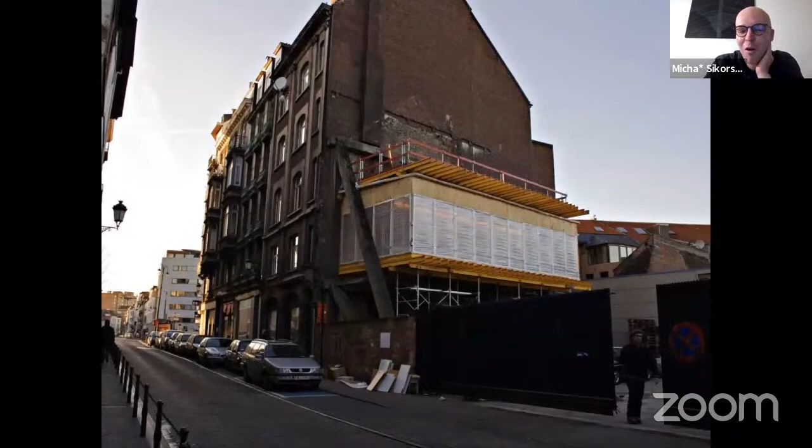You also built your own office, your temporary office in Belgium. And then 2 years later, you've been invited by OMA and Koolhaas to co-design and co-curate with them an exhibition about their work in the Barbican in London, an exhibition I had the opportunity to see. It was very, very interesting.

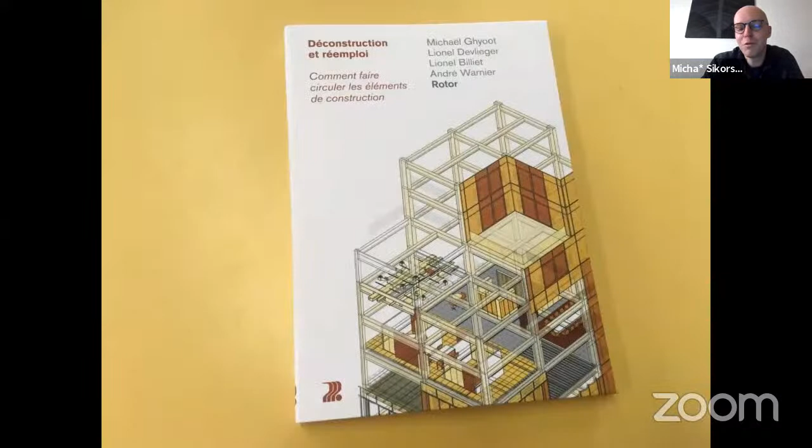You keep on writing also and teaching today in the most prestigious schools and writing articles in probably the best architectural criticism publication, Criticat. But on the other hand, you also build stages for rave parties or concerts, and you publish books at the Polytechnic School in Lausanne, Michaël, about reusing materials. You're really a Renaissance person, at the same time designing, being an expert in the field of material reuse, and teaching, and animating the architectural scene in Belgium and abroad.

On the other hand, you still find the time and the organization capacity to go beyond the normal way of practicing architecture and developing a new business model of selling parts of buildings. So you established Rotor Deconstruction, Rotor DC, which is a website and a physical shop in Anderlecht, next to Brussels, where people can buy whole parts of dismantled buildings. So you have an expertise of unbuilding buildings, allowing them to be rebuilt. Thanks to you, in my former kitchen, I had a piece of the Antwerp Town Hall. And in the flat I'm in here, we have doorknobs from also another Belgian building.

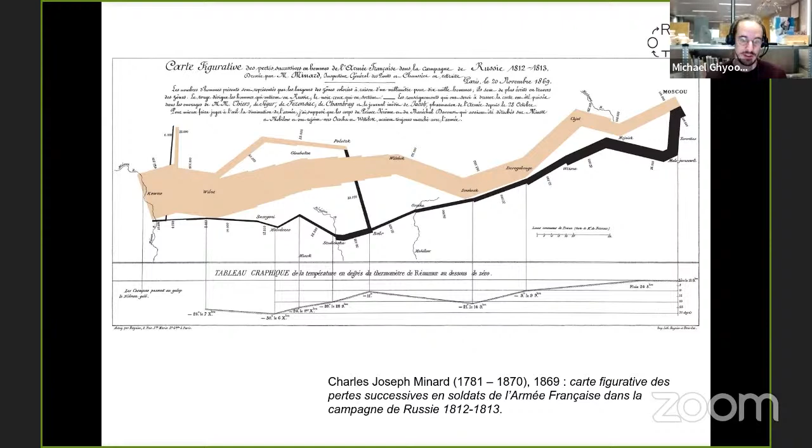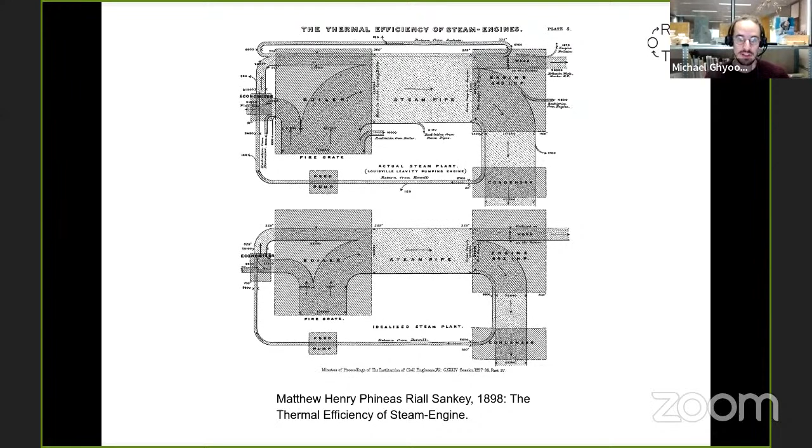So it's a good backbone for my presentation to try to share with you a few findings we have. We could start with the beginning of the diagram, the extraction of natural resources, which is probably the most important flow on the diagram. If you want to illustrate that, you could find very striking pictures, such as this one by Edward Burtinsky, which represents a copper mine in the US - not in Europe, but I guess it's representative. You see the scale, the magnitude of such an extraction site. To give an element of scale, these things there are trucks and lorries.

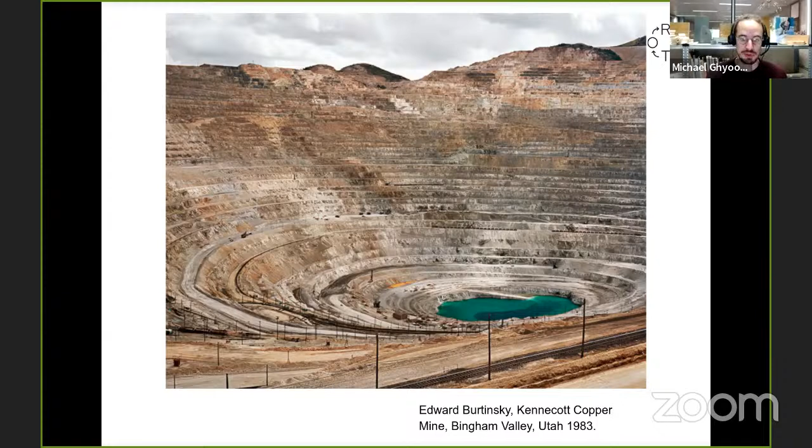So it's really a mountain that has been completely dug out to extract ores, which are then used to produce copper. This is interesting because the production and extraction in itself is a process that produces a lot of waste. Only a small fraction of what you extract from the ground is actually used to produce goods and things, and this ratio depends on each material. For instance, for gold, it's a very, very small amount of all what you need to dig out that is used to produce gold. It's a little bit better with iron ore that's used to make steel, for instance. But it's important to know that even extraction produces a lot of waste, and these wastes are maybe less known than the post-consumer waste that we are used to deal with on an everyday basis.

Not only mineral elements are extracted, but also organic elements such as wood, and it also comes with severe consequences for the environment - notably deforestation, which is really a big concern nowadays. I like this quote from a novel by Richard Powers, which is really an ode to trees and what trees are able to achieve.

It ends with this very interesting punchline, which says: to solve the future, we must save the past. My simple rule of thumb is, when you cut down a tree, what you make from it should be at least as miraculous as what you cut down. So it's an interesting reminder maybe for us architects who are used to using different sorts of materials, wood being part of them. Maybe if we continue on this diagram, we could jump to the second theme, which is the raw and the cooked, as a reference to Lévi-Strauss, of course.

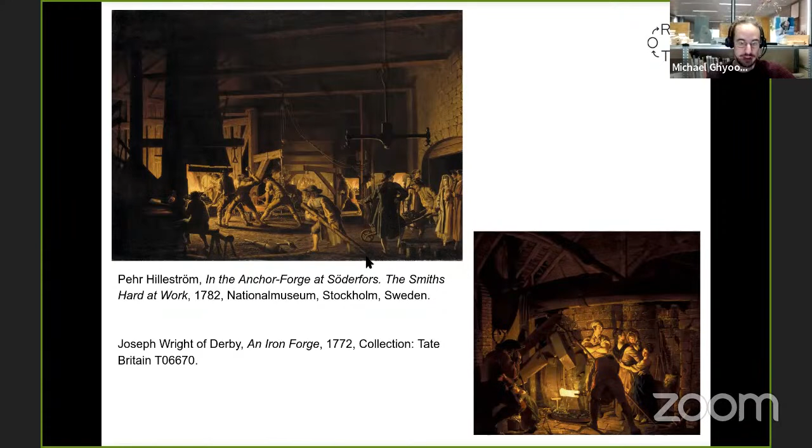As a matter of fact, most industrial processes at some point use ovens or kilns, some sort of heat energy to transform materials. You can think of the different metals made from forges, which use fire and got bigger and bigger to give birth to the high blast furnaces still used nowadays, which use a lot of heat to melt the ore.

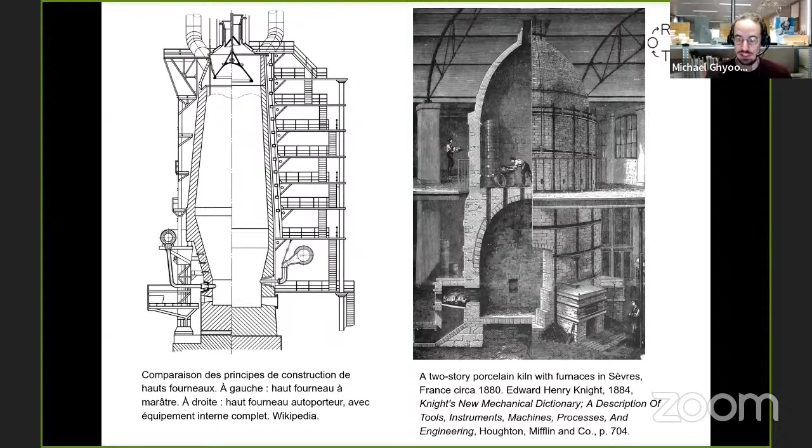But you can also think of bricks and faïences and different sorts of materials that are also cooked in kilns and ovens just to make them harder and more resistant. And obviously that also uses energy and fuels to achieve.

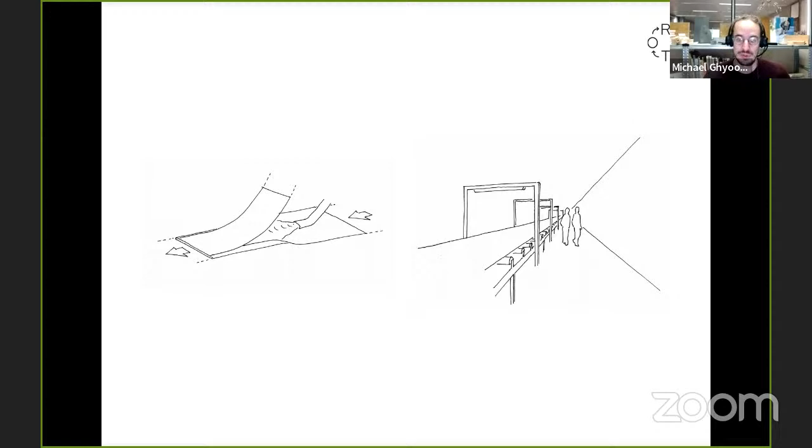You can also think of plaster, gypsum, which technically can dry in the air. You don't necessarily need to add any extra energy, except that in nowadays industrial production of plasterboards, they usually use an oven at the end of the process just to accelerate, to make it faster for the boards to dry. So there again, they use fossil fuels to produce even gypsum boards.

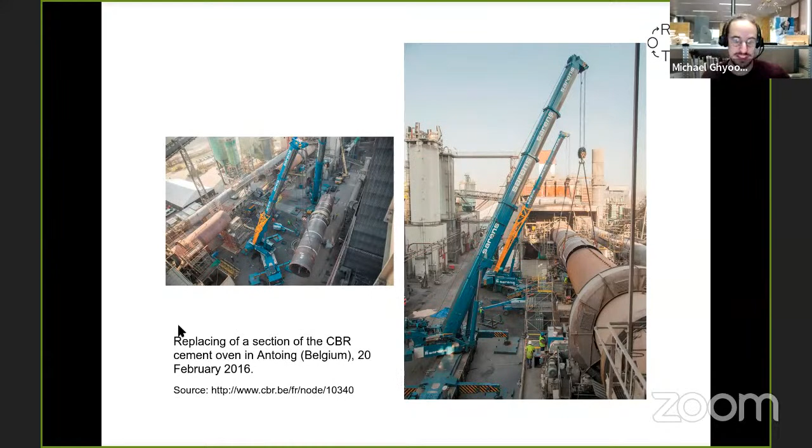And then maybe the most representative of all these cooked materials is certainly cement, which is made basically by heating chalk and bringing it to very high temperature where it transforms into clinker, which is used then to produce cement. Interestingly, the cement industry used to rely on fossil fuels until the 1970s and the first oil shock.

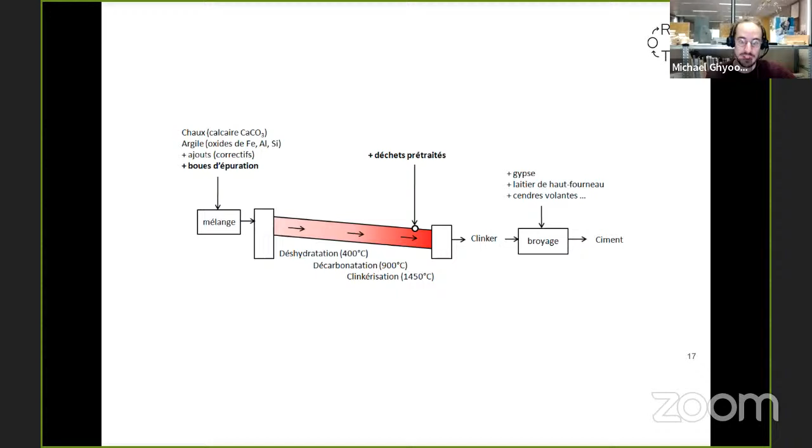And after that, they tried to diversify the types of fuels they could use. One of the things they use nowadays is ultimate waste coming from different industrial sectors, used for their calorific power. So you have, for instance, animal fats or used oils or different sorts of solvents.

Or in some countries, not in Belgium, but in other countries, you can even use tires, rubber tires from cars or trucks as fuel. And this is an interesting industry, not very well known, the preparation of those substitution fuels.

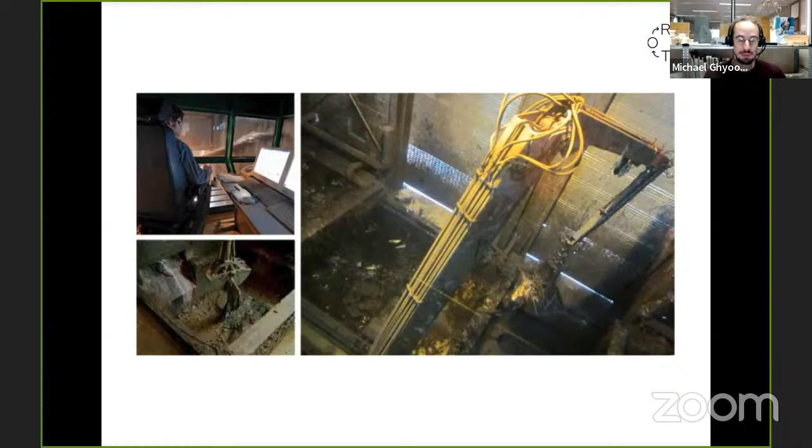Cement ovens are also used when you need to make something disappear. So for instance, when the police find, I don't know, drugs, they put it in these ovens just to make it disappear. Or when there is an epidemic of influenza in the meat industry, it happens that dead animals, carcasses, are just thrown away in these ovens to make them disappear. And actually, with their fat, they contribute to bringing this calorific power.

The thing is, and you're probably all aware of that, when you burn things, especially if these things are made somehow of carbon, as all the examples I showed, what you get is energy on one hand, water on the other, and then CO2, carbon dioxide. And obviously this is a major challenge for today.

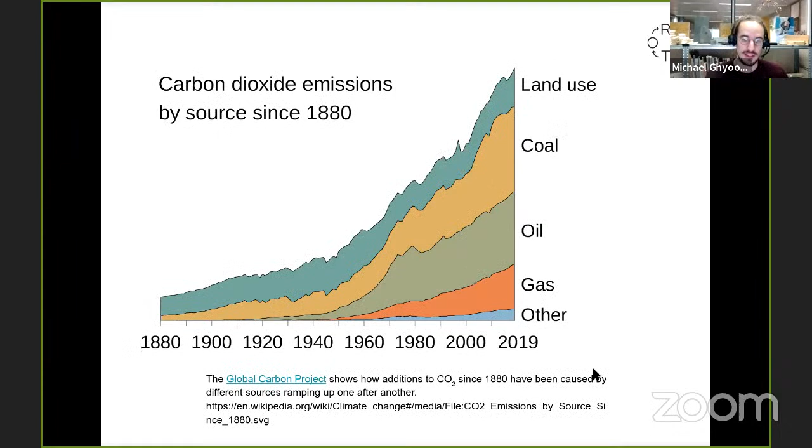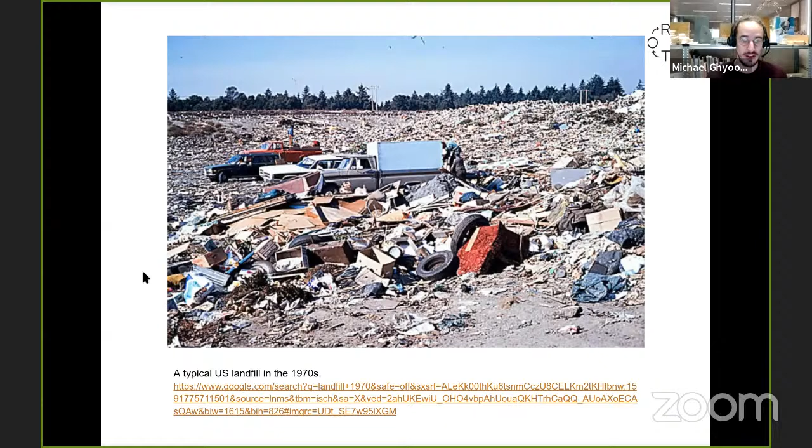So to put it a bit bluntly, during the 20th century, the major outcome for used goods was the landfill. And you see this sort of primitive landfills, which still exist nowadays in some regions, slightly more sophisticated today, but which also come with a lot of problems.

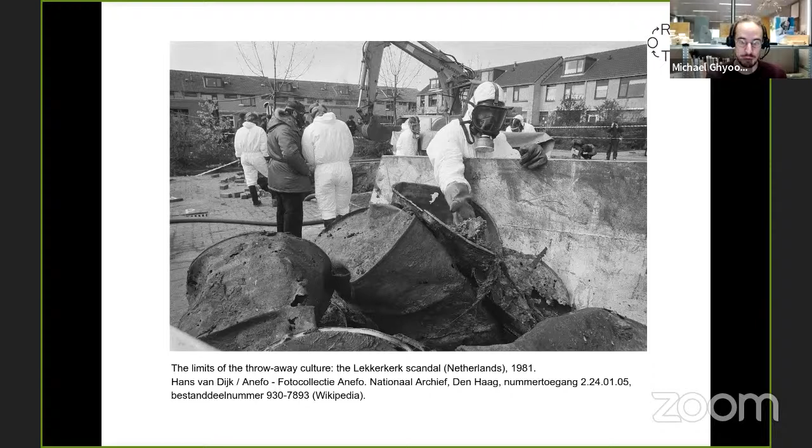This is a major scandal in the Netherlands in the 1980s, in which they found out that they built a housing development on a former landfill in which toxic waste was landfilled. This produced a big crisis, and for most European countries, from this moment on, they started to regulate much more sternly these landfills. Nowadays you find layers to protect the soils and avoid leaching and other undesirable phenomena.

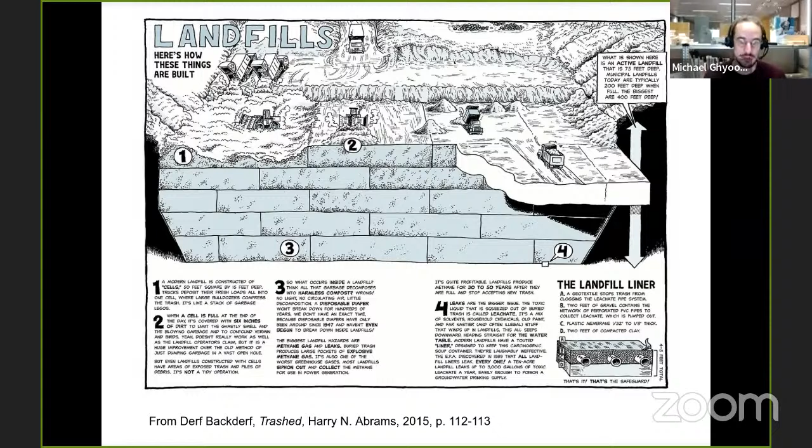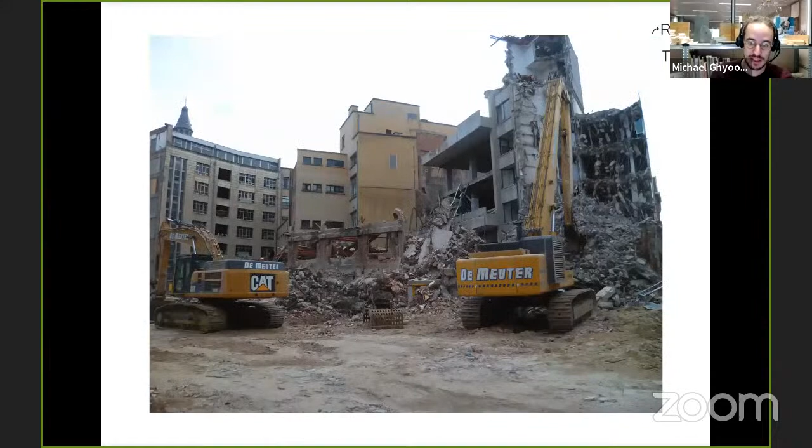Actually nowadays in the European waste regulation, there is a hierarchy that is enforced. The less desirable waste management strategy is landfill, then incineration, then recycling. Recycling, in this case for buildings, consists of trying to transform the materials back to the raw material that can then be used in new applications.

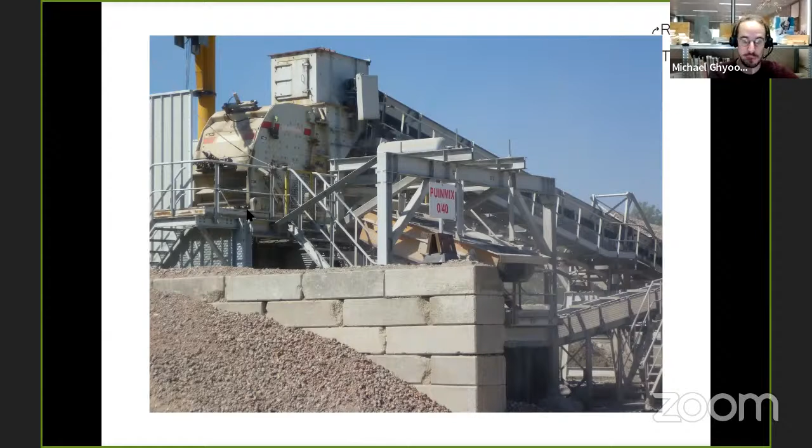You see there a crushing facility transforming concrete and masonry rubble into granulates, recycled granulates. They use different sorts of crushers to do that. Interestingly, most of these machines originate from the mining industry.

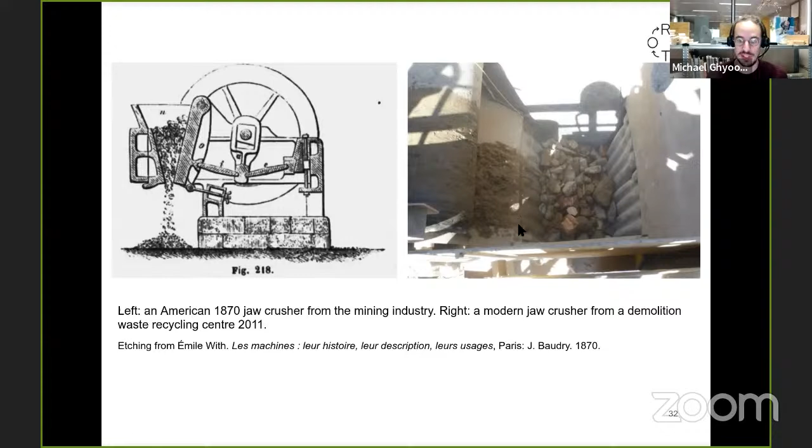In Europe, in some regions, you can really see a sort of translation from the mining industry that somewhere declined, but usually in this region you also see a rise of the recycling industry, and there is a sort of transfer of technology, but also maybe of labor and other aspects as well. So you see there a machine from the 19th century that is still used nowadays to crush this construction rubble.

Obviously, these recycled granulates are a good alternative to using raw material. They can help mitigate the use of virgin resources, but they also come with a loss - a loss of the use value of things. What used to be the structural backbone of a building becomes just backfilling material, and it also comes with a loss of economic value.

In some countries - in Belgium it is the case, or at least it was the case some years ago - the cost for the most basic granulate was simply €0 per ton, simply because the demand is way lower than the offer. In other words, we demolish more buildings than we need recycled granulates for building roads, for instance.

Interestingly, and that's maybe where the work of Rotor started, it's this finding that if you keep these elements intact - these ceramic tiles, these bricks, or these stone elements, I'm not talking about concrete here, but all these elements that are mixed in these rubbles - if you keep them intact and if you reuse them, they can have a retail value that is much higher than the value of the recycled content. So at least for these sorts of materials, reuse should be the preferred option.

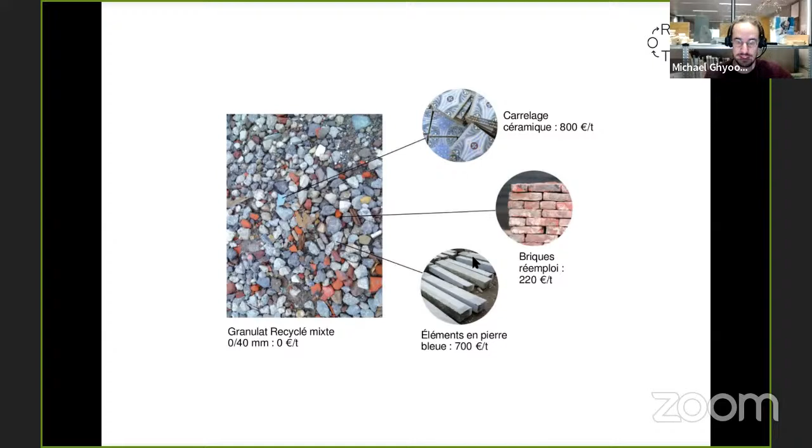So that also questions a little bit this idea that recycling could be the one-size-fits-all solution. It's possible, it's certainly a part of the solution, but it's not the only way to do it. We need to have a more global overview on this question. And that's maybe the idea that we find quite interesting, and that was a bit the starting point of Rotor: this idea of switching from dealing with flow to managing stocks of assets, stocks of natural assets.

This is actually the basis of this notion of circular economy, at least how people like Walter Stahel put it. They really see that as a shift in the economy, a shift towards modes of production of value that derive from maintaining existing goods in circulation, that derive from taking care of existing stocks.

And you could see that as a sort of extension of this notion of heritage that would start maybe from this idea of heritage as equivalent to listed buildings, but that would enlarge this vision to basically everything that has been built and that is existing nowadays, and that we learn to take care of, and that we learn to maintain and to preserve. And this is a very interesting and provoking idea.

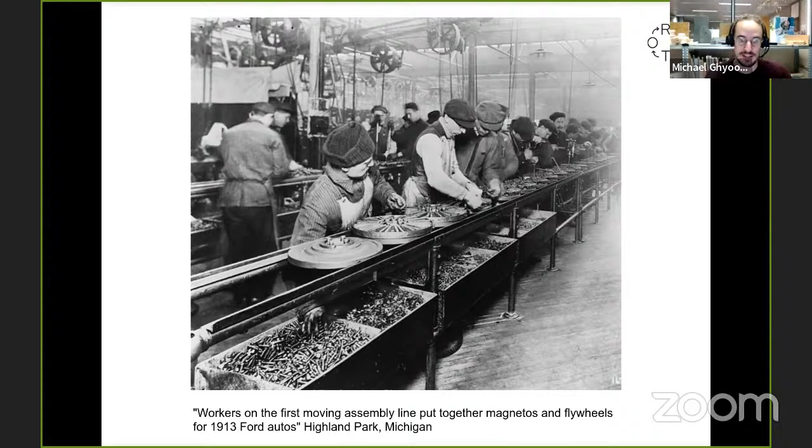Obviously, this mostly concerns inert materials. Food, for instance, couldn't follow the same pathway, but for the construction industry it's a very interesting notion. Walter Stahel explains that the industrial economy is based on the idea of increasing the sale of material and optimizing production to put as much goods as possible on the market, and as a consequence, making goods that don't last too long so they can be replaced by consumers, sustaining this productivist economy.

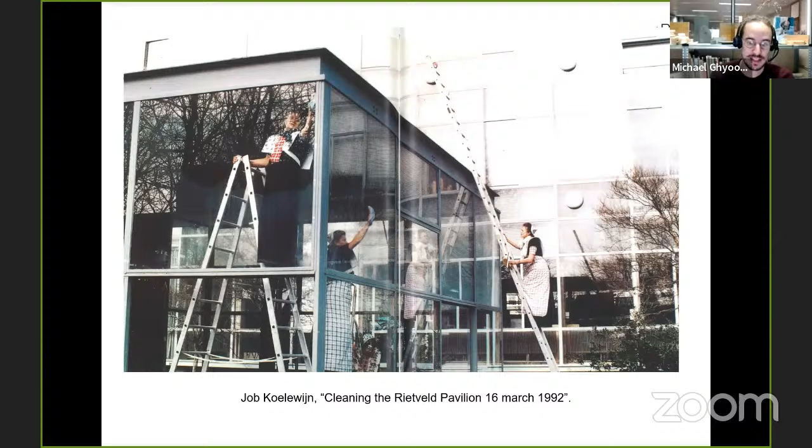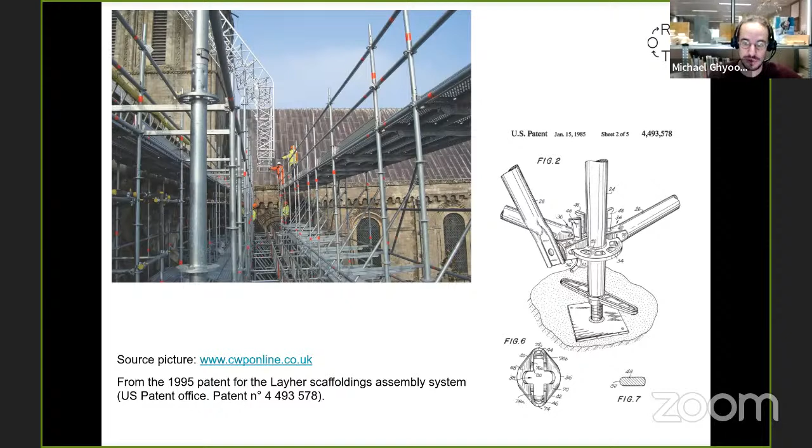The shift towards a radically circular economy would focus on trades such as maintaining buildings, taking care of them and cleaning them. Or you can find other examples in industry, like scaffolding, where systems are designed to be easily dismantled, demounted and reused again and again. Obviously the time span of scaffolding is relatively short, so it's easy to imagine these systems. It's a bit harder to translate that into actual buildings expected to last decades, but there are interesting things to learn from these systems.

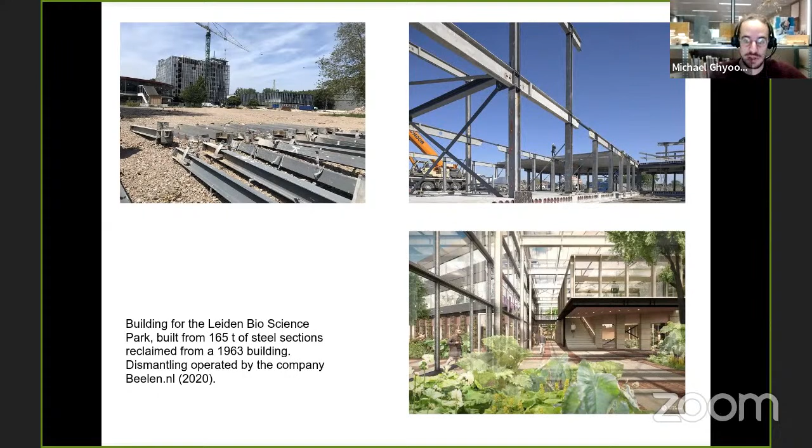Another example of an already circular economy is companies active in the reclamation and salvage of building components that can then be reused. In fact, reuse is an excellent way to keep in use a material that's not useful anymore in one place but can still be used somewhere else. This economy of reclamation dealers is super inspiring and important to us at Rotor, because it shows that circular economy is not only wishful thinking.

That's a project very important to us at Rotor: documenting this already circular industry, more specifically reclamation dealers. This project started in 2011, and the idea was simple. There was a will in the Brussels region to apply the principle of reusing building material, but it would be a mistake to start from scratch. It would be better to look at what already exists and see what we can learn from that, and build upon it instead of starting from a white page.

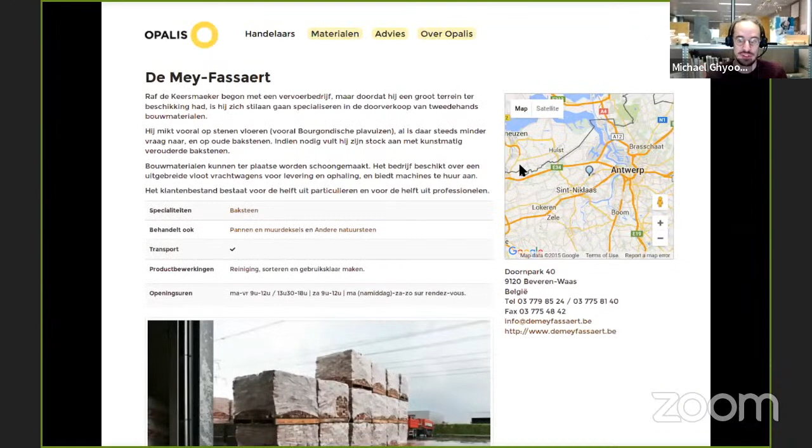I think Opalis was a very important project for launching Rotor Deconstruction, because among other things, we found out that if certain materials were taken in charge by these existing companies, there were still a few missing links, more specifically urban materials and materials coming from office buildings and specifically urban types of buildings were not usually salvaged, or at least at a much lesser rate than rustic or traditional classic materials such as bricks, pavers and stones and that sort of thing.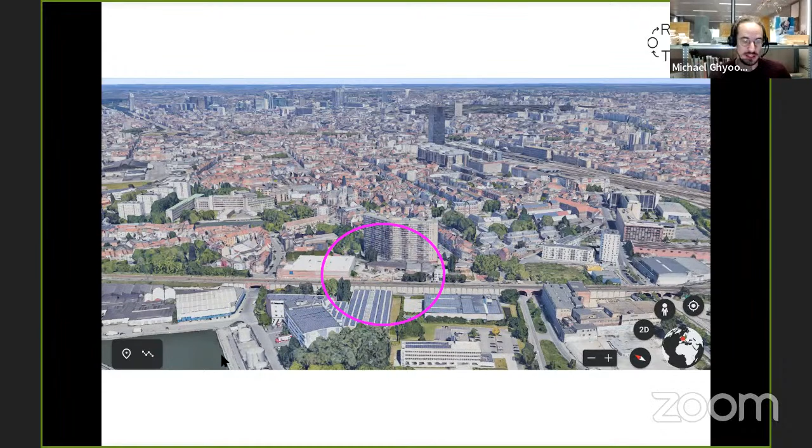So we are based in Brussels. We moved here in 2016. You see there, it's really the city center, downtown. So it's a very interesting place, just in between the residential, very dense, popular area of the city, and then a more industrial part alongside the canal, of which you see a small bit there.

So we are, for the moment, in a former chocolate factory. We don't use all this white warehouse, only a part of it, but we use all this yard and this warehouse. Basically, reusing materials requires quite a lot of space, and in an urban context, it's not always easy to find that. So that's for us a very big challenge. But we found this place on a temporary basis, and that was a good solution.

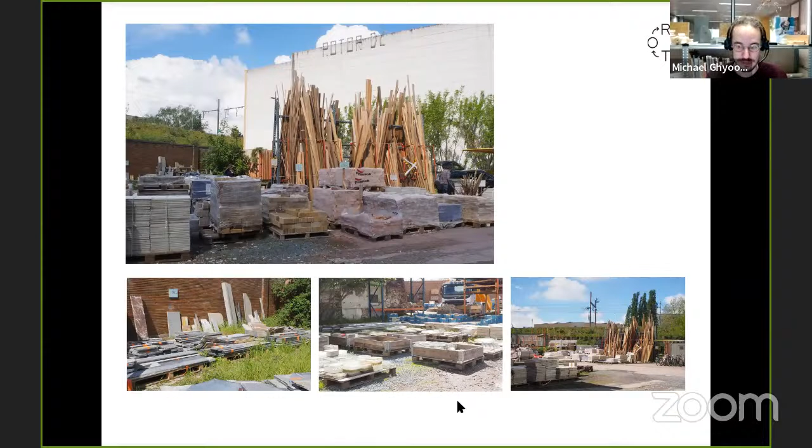You see there a few pictures of the type of materials that we reclaim and propose to our customers. These are pictures of the showroom, which is actually just behind me, where you see also a bit more precious materials such as luminaries and lighting fixtures, that sort of thing. This is a picture of the warehouse outside, where we store more bulky materials, but that can be left outdoor.

It has been quite an adventure to launch Rotor DC. Basically, we had to learn a lot of things while doing it. We are still learning quite a lot of things.

Even marketing materials is a challenge in itself. So beside the physical showroom, we also launched a web shop, which also allows us to keep a good view on the stocks. Because obviously that's quite important to know when you have a limited amount of, say, reclaimed ceramic tiles. You need to know in real time how much of it is still available for the customers, and that's why we invested in this digital solution.

A big part of the work is also the reclamation itself, the unbuilding of the materials. Sometimes we do that ourselves, and we have teams in-house that are able to do that. But we also try, and we increasingly try, to collaborate with other contractors of the construction industry, demolition contractors, but also different types of specialized trades.

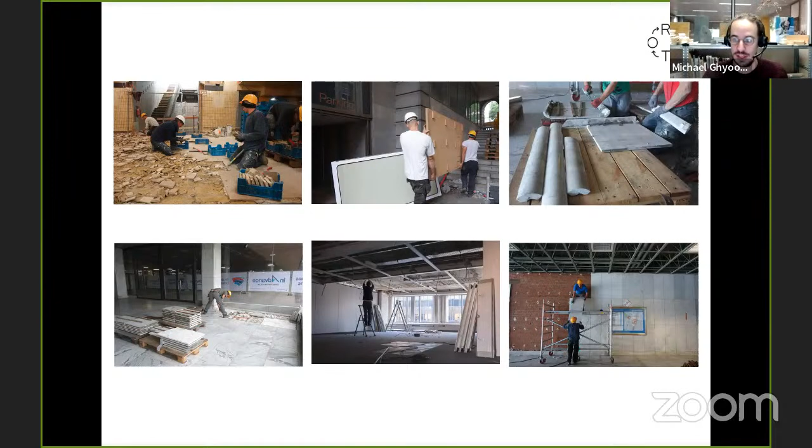They can bring materials to our facilities, and we take them in store. We clean them, we put them back on the market, and then we share the profits of the sale with these people who bring the materials. So it's a good way for us to expand the amount of materials, but it's also interesting because in this scheme, each and every contractor can potentially become a salvager.

And so that also allows us to focus on the actual preparation of the materials, because there is a big difference between a material that is just raw from the dismantling and a material ready to be reused. Sometimes you need to clean edges, remove traces of mortar, cut things to dimensions, rewire electric appliances, clean sanitaries, for instance. You have to document the materials because obviously customers want the most precise information. And then there is all the sale aspect and welcoming the clients and offering them the services that they may need.

What is paradoxical is that this idea of reusing and developing a business around reclaimed materials is not really new. In fact, when you look at the big picture, it used to be the norm during most of history, and it started to decline only during the 20th century.

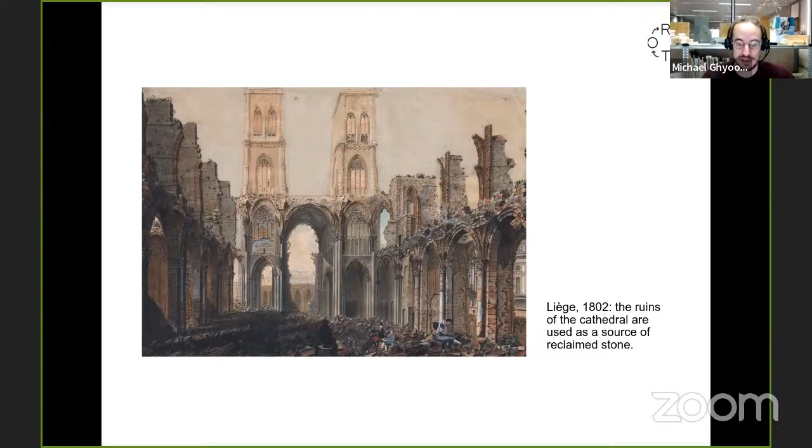This is another example, the Cathedral of Liège, which was completely destroyed during the French Revolution, but was still used as a sort of urban quarry for stones for decades and decades, and archaeologists still find stones from this cathedral being used in different buildings all around.

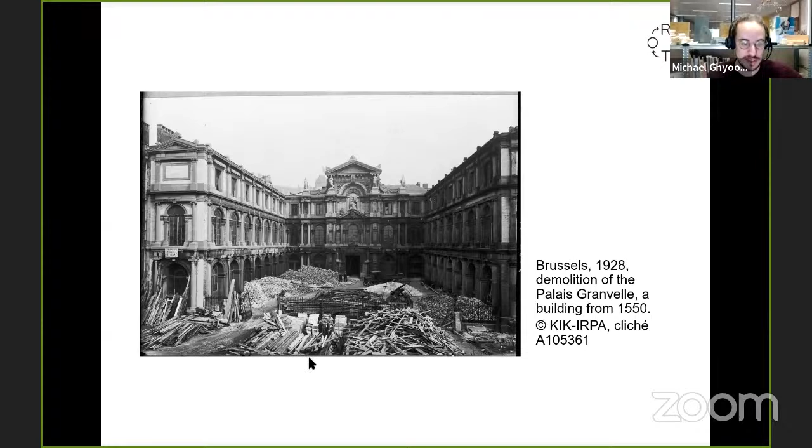This is an example from the early 20th century in Brussels. It's impressive to see how well sorted these materials are, and obviously there is the intention of reusing part of them, which explains why so much care is invested in this demolition. If you look there, you see this small ad on the facade.

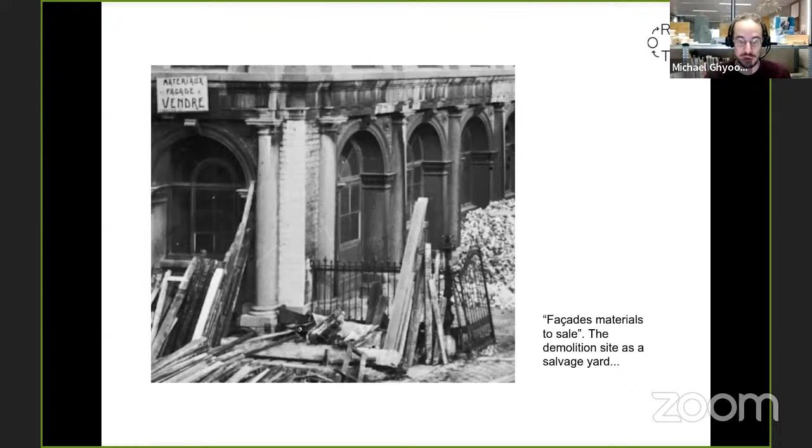This ad advertises the sale of facade materials. So apparently the demolition site at that time used to also be a sort of salvage yard, a shop where people could buy materials. That's also an interesting story.

Even in the middle of the 20th century, during a world exhibition in Brussels in 1958, a lot of pavilions that were built in steel could be entirely unmounted and rebuilt, sometimes a few kilometers further, sometimes even in another country. Some of them are still used nowadays with different functions and programs. So that's another interesting story.

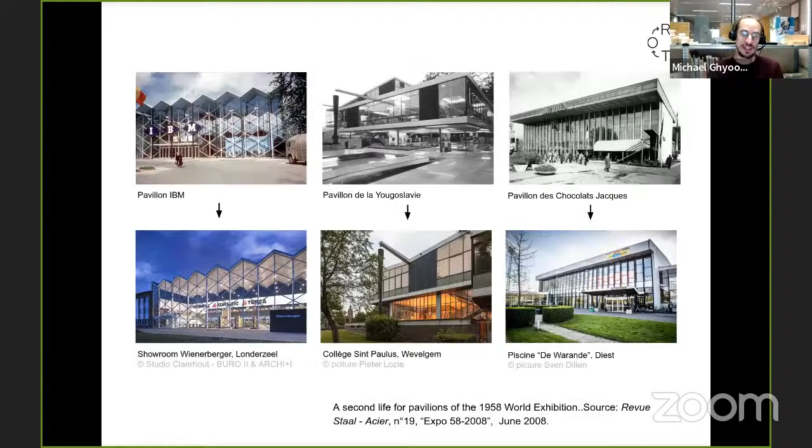But it's probably more the exception than the norm, because since the second half of the 20th century, a completely different story grew: destroying buildings by making them explode with explosives such as dynamite, and then just throwing all the rubble in a landfill or brownfield nearby.

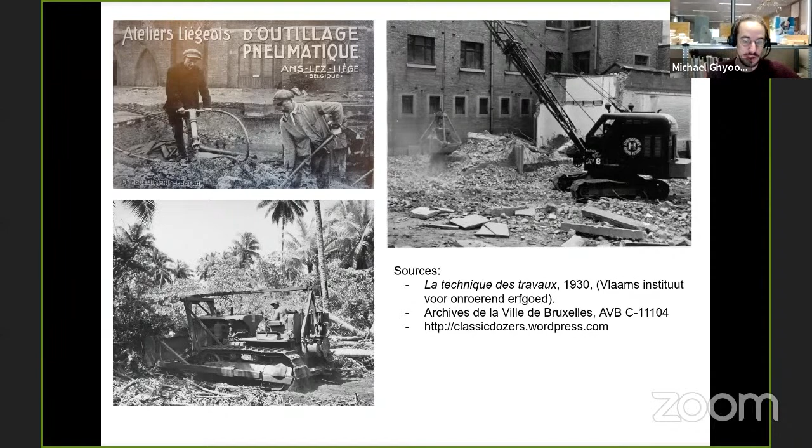The mechanization of the works certainly plays a big role there. The appearance of jackhammers and diesel engines, and the development of bulldozers during World War II, was also a big factor for the mechanization of demolition works. The cost of labor was also important, and the need for speed, especially in urban areas, was probably also a determining element.

This is a press clipping from the New York Times in 1931, in which a demolition contractor explains how his trade has changed in a few years' time span, saying the high cost of labor made it unprofitable long ago to clean off the old bricks for second use. Thus, the wrecker saves what he can, but only as long as salvaging does not slow him up unduly. So there is really this expression of the need for speed.

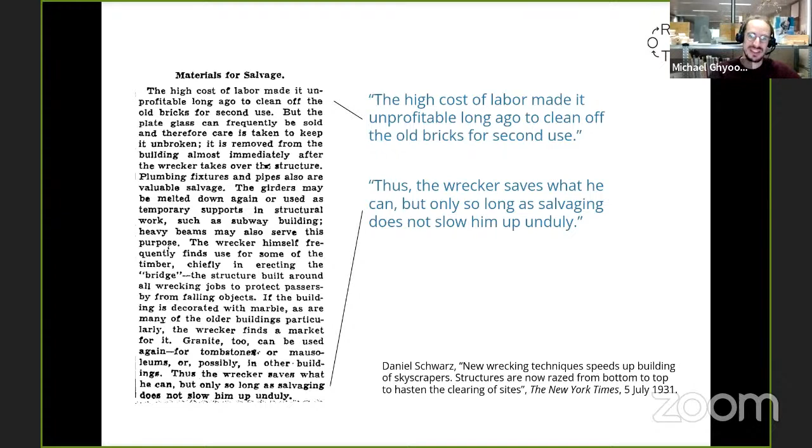Even in the contracts for demolition works, you can see a shift toward a new system in which contractors are asked to be as swift and quick as possible, and they can get premiums if they are faster than expected, but equally high penalties if they're unable to meet the deadline. So there is really an increasing need for speed. Another important factor was probably also the huge diversification of building materials in the second half of the century, which made it much more complex to organize the salvage and reclamation of materials afterwards.

So where does that lead us today? Because all these factors obviously are still present today. There is still need for speed, there is still pressure from real estate, labor in Europe is still relatively high, and we still face a huge diversity of materials.

A good way to summarize how reuse can be implemented in a project is through this notion of flexibility. To illustrate that, I'd like to share a relatively recent project, the renovation of the Zinneke facilities, a project we co-designed with Zinneke themselves as the contracting authority, but also with the architects from West, a Brussels-based office. Zinneke is an artistic and cultural organization in Brussels.

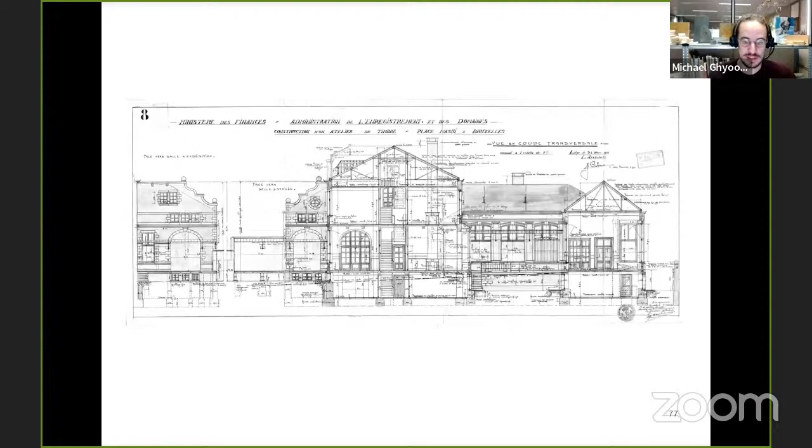A few years ago, they acquired a strange building made of two street houses, quite beautiful classical Brussels houses - what we called the castle. It's a huge building with a patio, and then this sort of industrial warehouse with a small house in front of it. In between, there's a house that isn't part of their facilities. Thanks to European funding, they launched a renovation project for these buildings. You see there the section of the castle with the patio.

To make a long story short, I'll just focus on one specific intervention in this project, which had as an objective to preserve as much of the existing building as possible. So really consider it as heritage that should be preserved, and with very small interventions, adapt it to its new functions and enable new uses in it.

Another objective was to foster the reuse of building materials. One operation concerned the windows, for which we tried to find reclaimed windows. There is a market for reclaimed windows - a few dealers specialized in this sort of material, and some even have their stock online, which is convenient when searching for specific sizes and types of windows. So we knew it would be possible to find this sort of window.

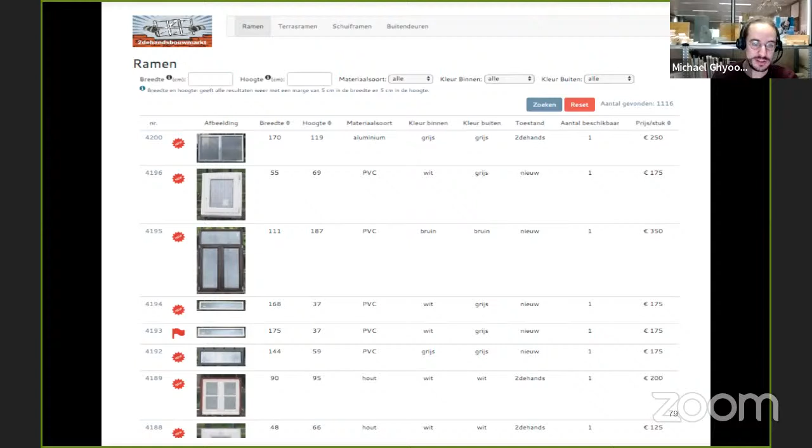But then we had to introduce the building permit. At that moment, the contracting authority hadn't bought any material yet, because they weren't sure whether they'd get the building permit, or maybe get it with some modification requests. So what we did was suggest the minimal and maximal area for these windows, by summing up all the requirements in terms of urbanism, fire safety, lighting, etc. It was almost a mathematical formula that gave us these minimal and maximal areas.

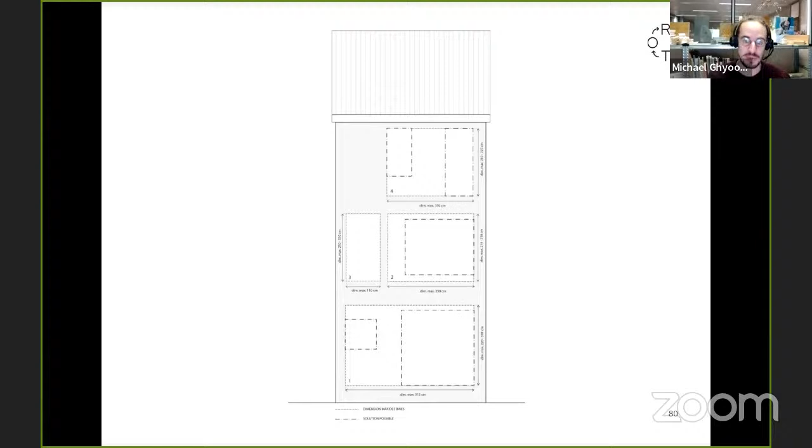Because it was a back facade with not a lot of views from the street, it was accepted by the urban administration. But then we had to contract and procure these windows.

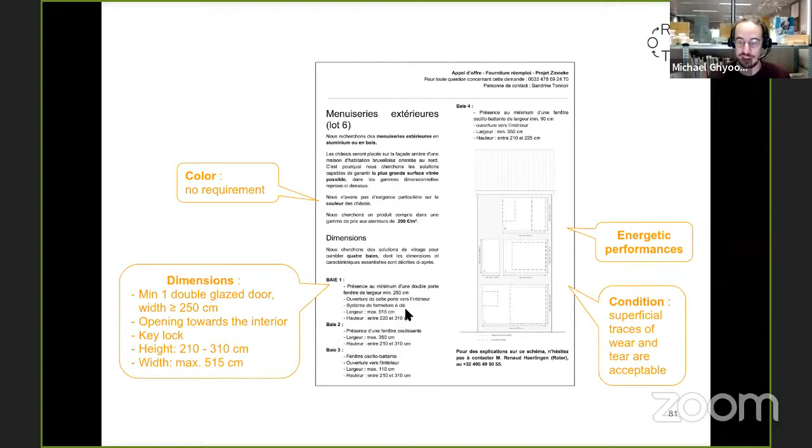For that, we had to write specifications that needed to be specific enough to ensure we met important performances, for instance in terms of energetic performance. But all the while, they needed to be quite open on some aspects, just to make sure we would meet the actual offer of the market. For instance, in terms of colors, we had absolutely no requirement - it wasn't important as long as they had the right dimensions and performed well enough.

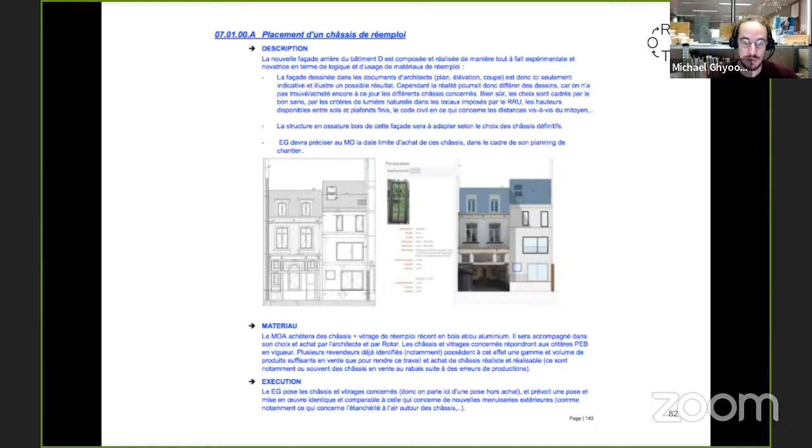So we also had to put that in the work contract, explaining to the contractor that they would need to buy these windows from the reclamation market and then install them. And then as the works went on...

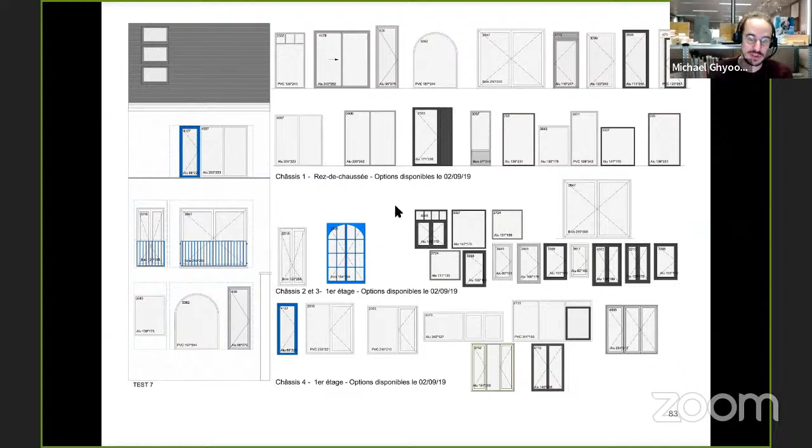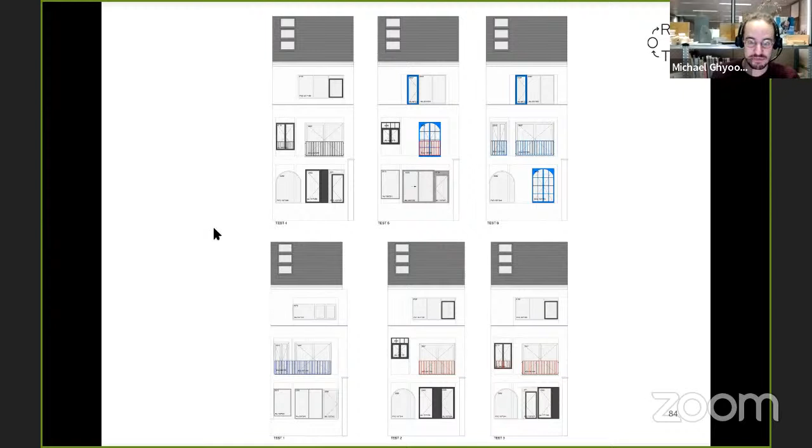We looked back at what was available at that very moment, and to our surprise, there were more options that met our requirements than we expected. That allowed us to start a sort of composition exercise, and the architects had a lot of fun doing that, because at some point we were afraid it would be a slightly disappointing decision based on one or two elements - a yes or no choice. But that wasn't the case - there were enough windows to really design things as an architect.

Interestingly, among the selection there was a rounded window, and I'm pretty sure the architects from West would not have drawn that spontaneously. But because they found it interesting in the selection, they started to play with it in their composition, and ultimately used it for the window - they just turned it upside down to give it a bit more effect, also for the interior design. And so that's the almost finished result.

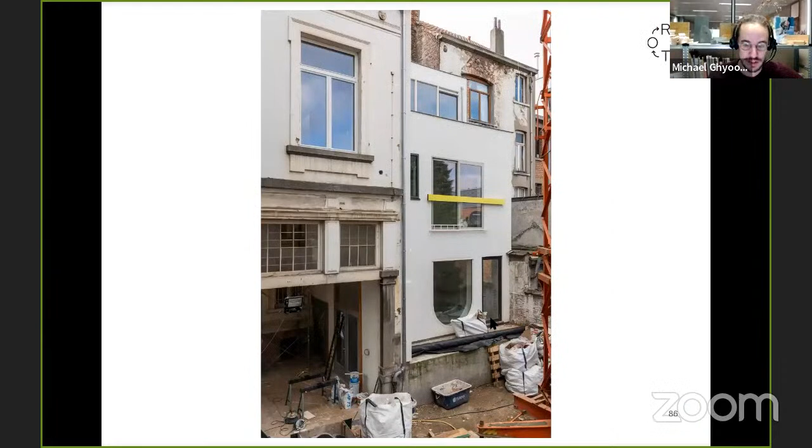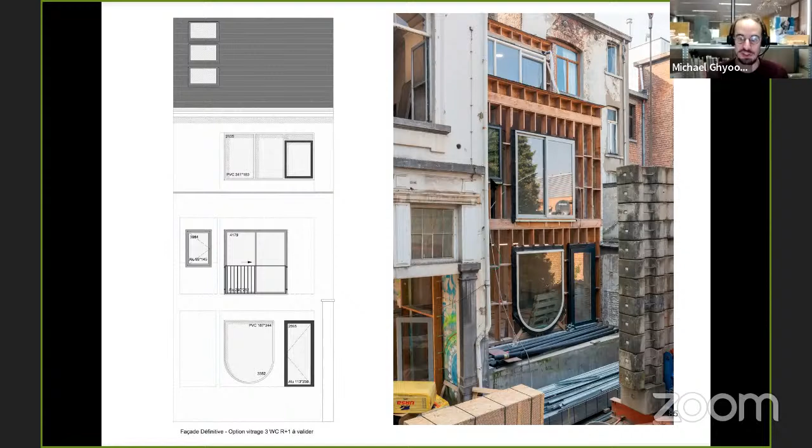In this case, the fact that the facade was a wooden structure allowed us to have this sort of flexibility in terms of the dimensions of the bays. Another example was the procuring of ceramic tiles.

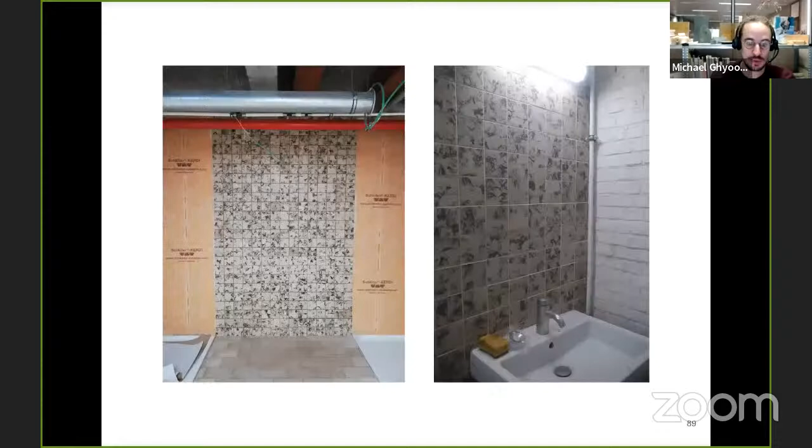It's exactly the same exercise, trying to define what is important and what is less important to make sure to meet the available offer on the market. And these were used for different parts of the building. So these are only two examples, but in the end, we did a lot of efforts to promote reuse in this project.

At the end, we made a report on these efforts, and this is the summary of that. You see on the visual representation that the efforts in terms of preserving this heritage were quite intense. So we could preserve 94% in mass of the existing building, meaning that we did not remove a lot of materials from these facilities. And this is the representation of the demolition waste, which was quite minimal.

This is the representation of all the materials that were imported on site for the new developments, and 12% of these are from a reuse origin. That's a pretty high score. It's explained because it was a pilot project with specific funds to explore and develop new solutions. Without this public funding, we wouldn't have reached such a result.

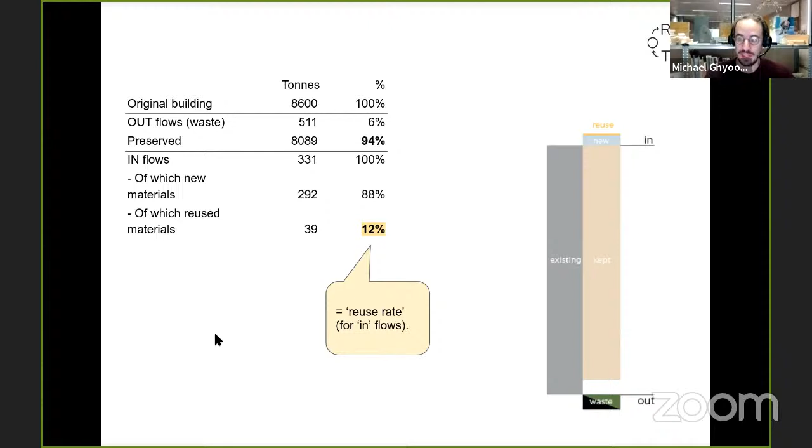But even with a high result here, it's still pretty low, and it's sometimes a bit depressing to see that despite all these efforts, you can only reach 10% of reuse. I think it's important to mention a few barriers that, in my opinion, are beyond the influence of the architects—things more related to the global context in which we operate. There is only so much you can do as part of a specific project, and it's important to have a more holistic view on these obstacles if they are to be tackled, and if reuse is to be promoted for its environmental benefits.

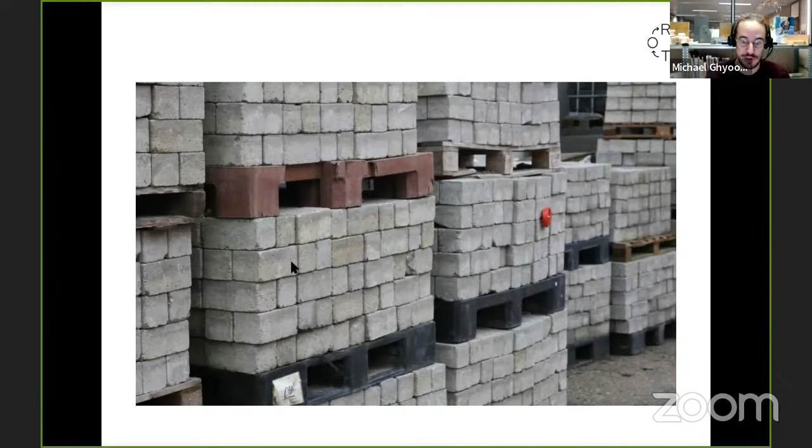One of these barriers is the cost of new materials. You may say new cheap materials are the main competitor to reclaimed equivalents. A good example is concrete pavers, which technically are super easy to unmount, dismantle, and reclaim, but the cost just to put them on a pallet is higher than importing a pallet of new concrete on site. In today's economy, there's this glass ceiling of the cost of labor that prevents these materials from being regularly reclaimed and reused. This is only possible in very specific contexts, so yeah, this is a big obstacle for us.

Another big obstacle is the way the construction industry defines and controls this idea of quality. We've inherited about a century of practices that evolved together with the industrialization of material production, so nowadays the framework to assess quality is completely adapted for new mass-produced elements, but unadapted for reclaimed materials, which come in much smaller, more specific batches that require new approaches. I'm not saying we have to lower the criteria for quality, but we have to find new pathways to demonstrate that reclaimed material meets the requirements.

This is something we've also been working on during the big European project, the FCRBE project, together with research institutes. So things are moving on that front, especially for bricks in Belgium, which are an important reclaimed material. I think we are almost there—it's almost as easy to use reclaimed bricks as new bricks—but for other materials, there's still a lot of work to do before reaching this level of confidence.

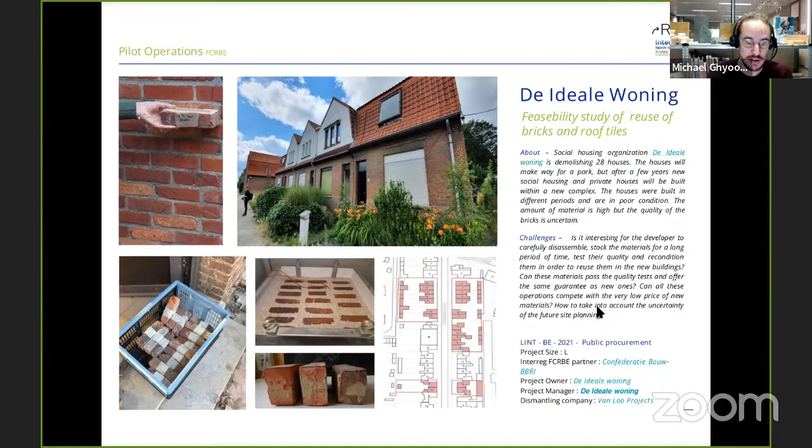Another important aspect is the notion of skills and know-how, and how laborers are trained, because when the skills are there, reclamation becomes much easier than when there is no skill, or when you've destroyed all the know-how of the workers. So you could say promoting reuse is also a good way to foster the training of workers, and the embodied knowledge they need to reclaim and reuse these materials. That's another major challenge for us.

Then there is another obstacle: this habit. I don't know how it happens in Poland, but in Belgium, and especially in Brussels, we still have this habit of completely destroying an existing building to build it anew. Most of the time, the new buildings have almost the same typology, the same volume, even the same aspect as the original one, and obviously this way of dealing with the built heritage is not very sustainable.

It entails the production of a lot of waste. Reversely, it also entails the use of a lot of new materials. Say, for instance, this building, it's about 20,000 square meters that produces about 20,000 tons of C&D waste, but equally you need 20,000 tons of new materials to build it anew.

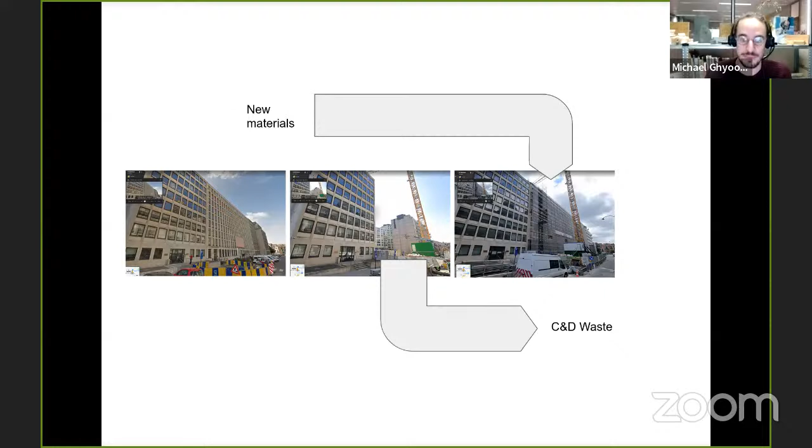Now, say that you would preserve it, or at least preserve the general structure, you could reduce quite significantly the outflow, producing way less waste, which also makes it much easier to manage it properly and to foster reclamation in this flow. And equally, if the flow of new material is also smaller, then you can go for material with less impact and work with reclaimed material or bio-based materials, which would be impossible if you had to deal with volumes of 20,000 tons of material that have to be delivered in a few weeks' time.

And then I'm a bit over time, but I will finish in this last part with another very important aspect for us. So far I spoke a lot about the technical aspect or the physical aspect of the material, but obviously a building material is part raw matter, if I can say, but it's also part cultural aspects.

And these aspects are at least as important as the technical ones when it comes to fostering reuse and reclamation. You could mention the notion of obsolescence as a way in which an element is discarded, not because the element itself has declined, but because the context in which this element is placed has changed, and the ways materials are evaluated have evolved, and that makes this material undesirable, and that explains why it is transformed into waste. It's a very powerful notion, this notion of obsolescence. Let's just remember that it's not the material in itself that declines, but the context.

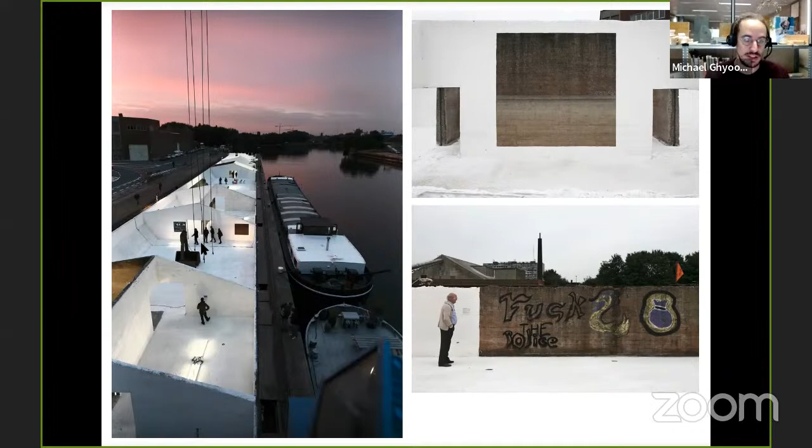For instance, there you see the colors, the way the concrete decolored due to the types of materials that were stored there, left to the open air or covered with materials, or a bit more naively the graffiti left by previous users. But we were also interested in the development of plants and lichens and mosses, all these traces that when you look at them carefully really enhance the value of the place. So you have to enhance them, emphasize them, and that's what we tried to do by keeping intact a series of frames in this space.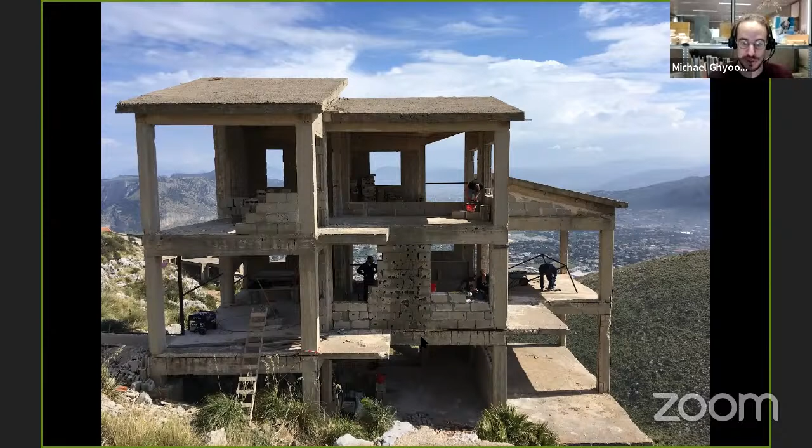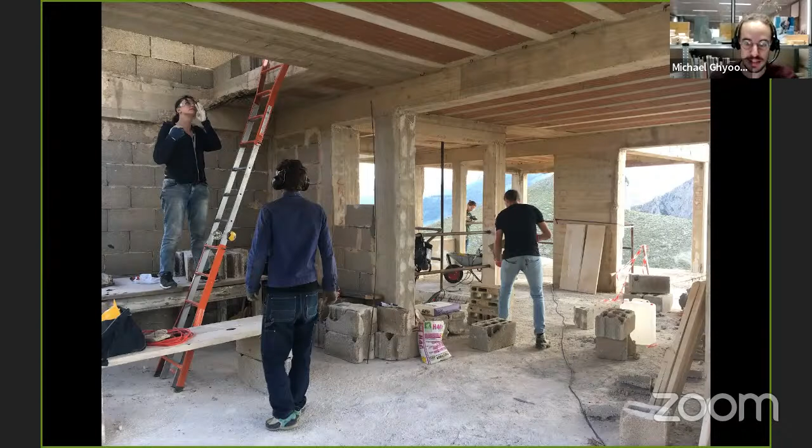What we did was propose a walk from the city center to the top of that hill. It's quite a hard walk because it's very steep and quite hot - there's no easy way. We had to follow paths left by animals. Then, to reward the walkers, we adapted one of these skeletons as a sort of refuge where they can make a break and enjoy the view on the city. So basically the project was making it secure, avoiding injuries in this place, making it a bit more comfortable and welcoming, and documenting and tracing the walk up to the top of the hill.

The idea is that from the top of the hill, especially if you walked up by feet, sweating and suffering, this experience can change how you look at these skeletons and this project. That was basically the main point of it. The name of that project was 'From Up There, It's a Whole Other Story,' and I think it summarizes what we tried to do in this case.

A last project in which we explored this theme was a very recent project for the scenography of the Mu.zee - a museum in Ostend for Belgian art. It was in a very beautiful building from the 1930s, I think. But through the years, the qualities of this building somehow disappeared behind layers of plaster and it evolved in a strange direction. Our contribution was simply to remove unnecessary partition walls, for instance finding back this beautiful balcony, these mezzanines with a beautiful view on the main rooms, but also opening the windows to bring a bit more light.

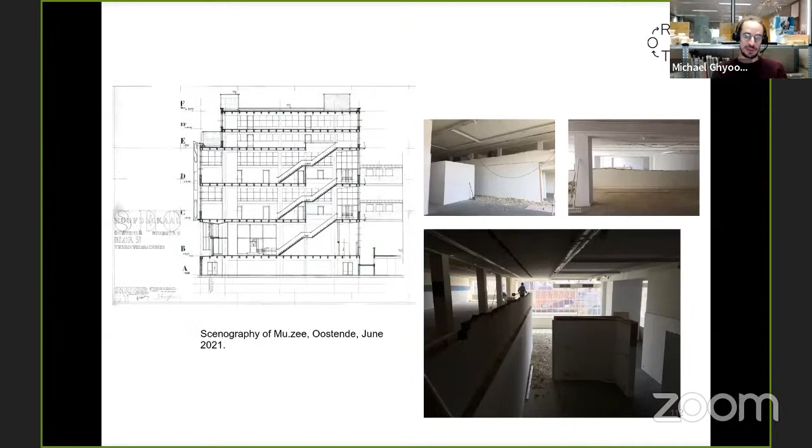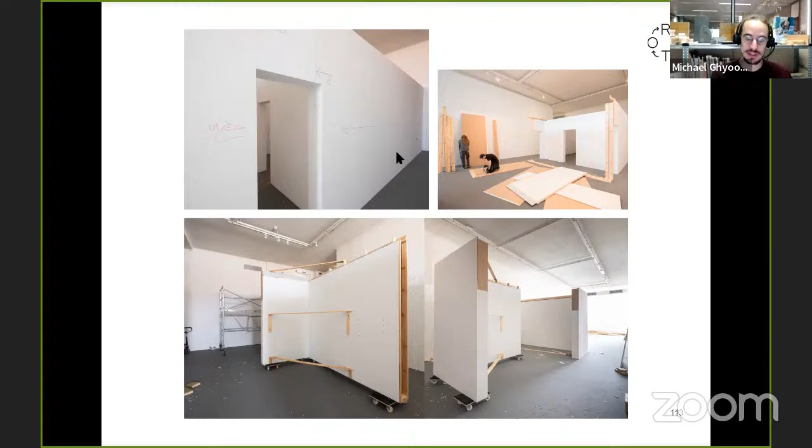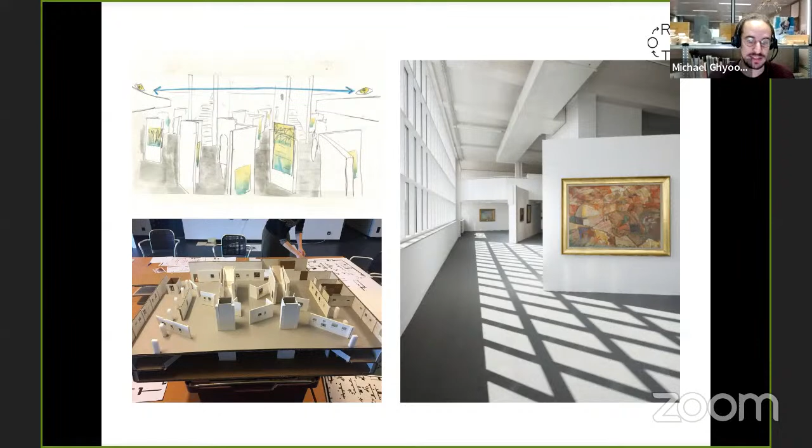A few elements were removed, but a lot of elements were simply displaced. Many of these light partition walls were carefully dismounted and moved, then replaced in a way to propose a completely new museographic experience. Again, it was mostly a question of playing with what was already there as a way to change the view and the way we relate to the existing building, transforming it into valuable heritage that can enable new uses and applications. We tried to keep it as impactless in terms of materials as possible. I think this notion of documenting - be it materials, be it existing buildings - and finding the almost immaterial ways to transform them and make them valuable again, that's maybe another very important golden thread in all of Rotor's projects.

And I will conclude on that. Thanks a lot for your attention, and sorry for the overtime.